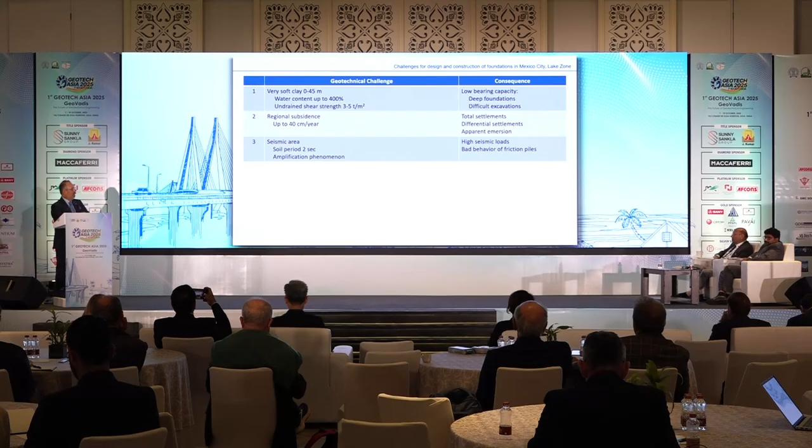To end with, we have a seismic area with this kind of soil period and amplification phenomena, because the soft clay presence conducts to high seismic loads and bad behavior, especially with friction piles.

In excavations, that's the topic for today, the record in soft soil is 40 meters, in sand and clay 40 meters, and in silty sand 50 meters. There are some examples of those kind of excavations, which are a challenge these days.

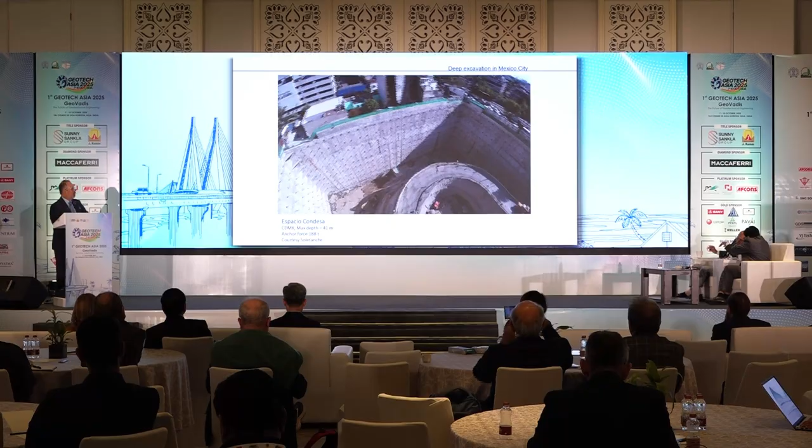This video, courtesy of Soletanche Bachy, shows you this kind of excavation. This is 40 meters depth, supported by a slurry wall, and the shoring system is post-tension anchors. You can see it's a challenge both in geotechnical and logistic engineering.

So we have to manage to interact between contractors and consultants to solve this kind of construction procedures.

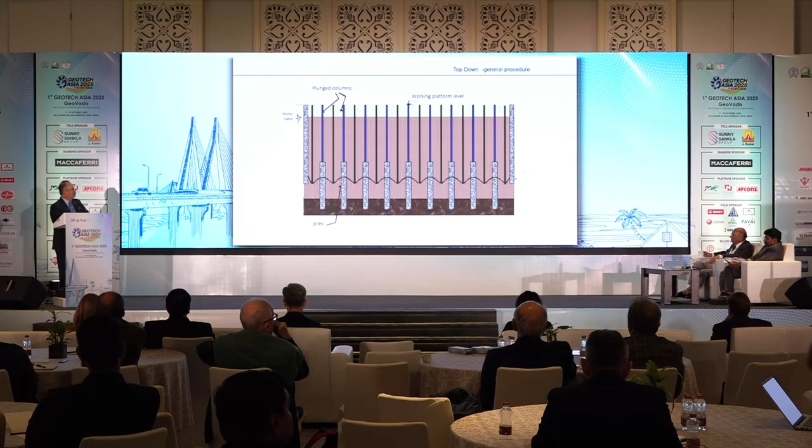Afterwards you construct the ground level slab, leaving a separate void to access for excavation. Then you excavate under the slab, which is supported by the slurry walls and the piles, and you can excavate the first level of basement.

At the same time you can go up with the structure. That's how it's called top-down, because you go top and then you can go down. It saves a lot of time in the construction schedule overall, since you are doing these two activities simultaneously. Then you build the intermediate slab, keeping the same void that coincides with the one on top.

Now, this slab is a shoring system itself. It saves money for the client because you are not using material that will be disposed of later, like a strut or anchors. This slab is part of the final slab construction.

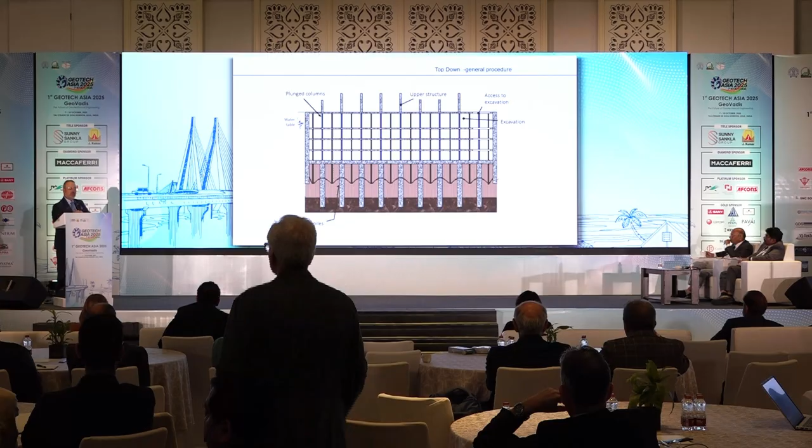You continue this process until you reach the bottom slab, and then these columns are usually completed with more concrete and reinforced steel, and you can also build the car ramps or the elevators and stairs.

Some issues are the plunged columns, which you can put in several ways. Usually they are small metallic profiles like beams, boxes or pipes, and afterwards you cover the columns with more concrete and steel. The problem with these columns is that they should be perfect, because they are the final columns of the project, so they are difficult to put in place.

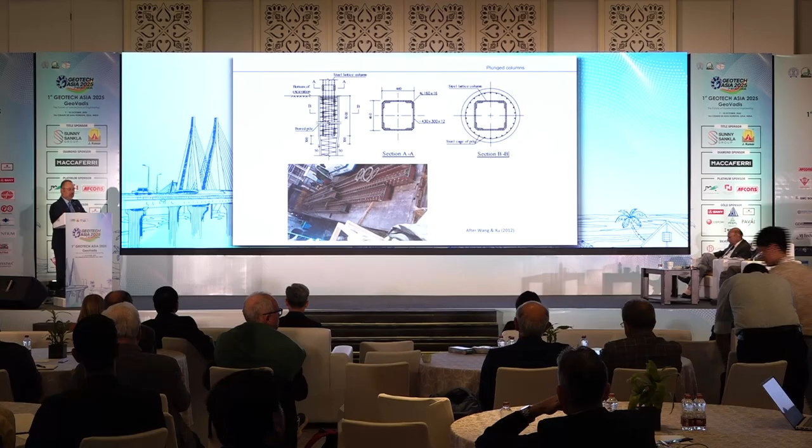Also, you want to add some extra shear devices, like Nelson studs that go inside the concrete of the pile, to increase the shear resistance of the column.

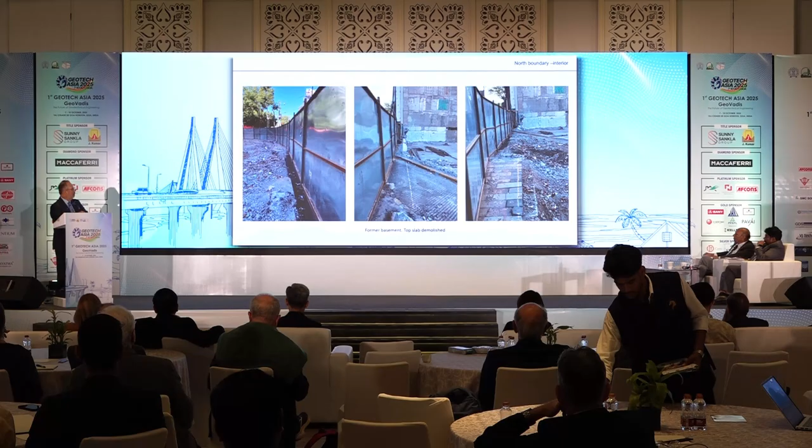On the inner side, the client had already demolished the basement, but not the walls and the bottom slab of the previous project. Now we began demolishing the previous basement wall using soldier piles and some shotcrete, like here.

And we protected the sensitive houses with some wire mesh and hand-placed mortar to avoid damaging these structures.

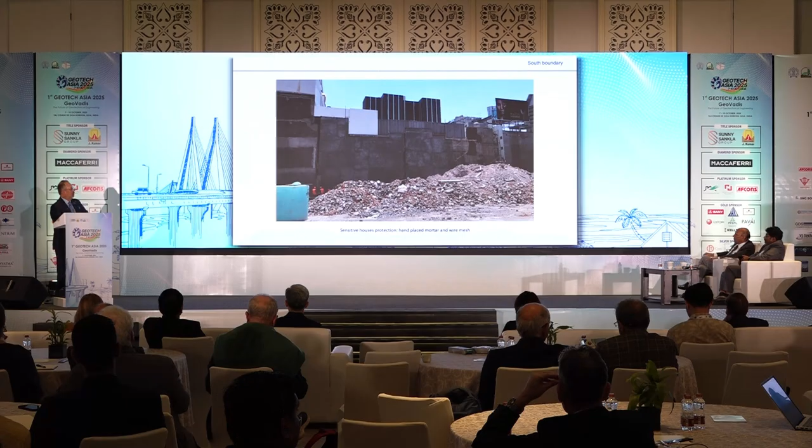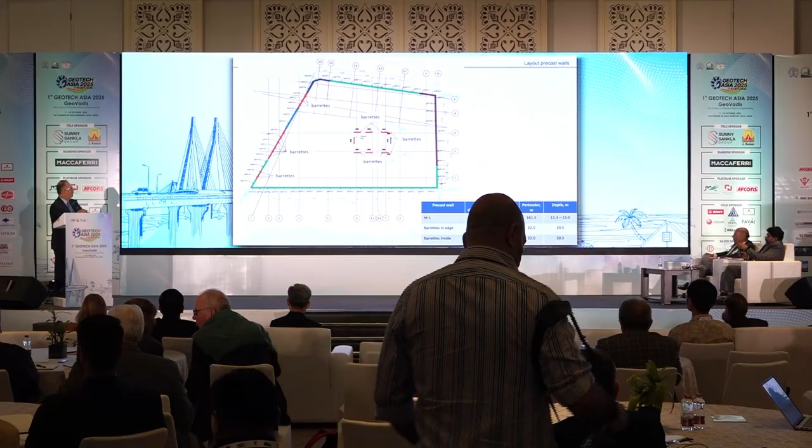The project was solved with a perimeter slurry wall. The architect didn't want columns around here, so we integrated the walls as barrettes in this boundary, and also within the elevator stair area.

So these barrettes are at the same depth as the piles, 30 meters depth. The rest of the wall is only 11 to 15 meters depth.

The general procedure for the precast walls was to excavate under slurry mud, using either bentonite mud or ordinary mud. I think in this one we used ordinary mud because of disposal difficulty. You place the wall inside the excavation, leaving some space in the sides and bottom, which is filled with a self-hardening slurry made of cement, bentonite, and water. The wall is hung from the guide wall with a special device, and when the self-hardening slurry gets some resistance, you can release the wall, and it's sustained by lateral friction.

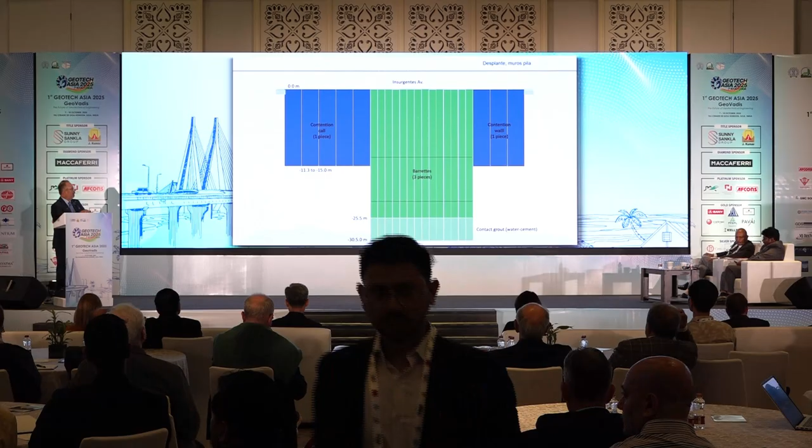Viewing the cut of the walls along the boundary, the foundation wall is in one piece like this, but the barrettes are made in 3 pieces because they're too large, 30 meters long. And remember, they are precast.

This is the detail of the typical precast wall, 3.5 meters width, 40 centimeters thickness, and the barrettes are smaller, 2 meters, because they are made in 3 pieces.

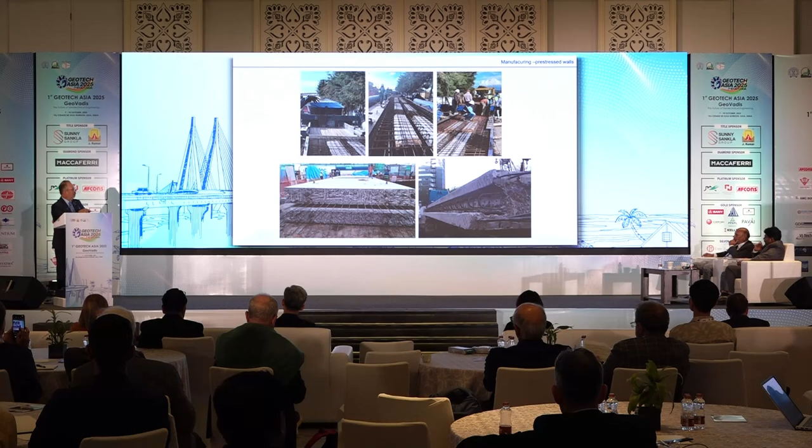This is a view of the manufacturing of the prestressed walls. A prestressed element has the benefit that you have higher resistant bending moment, so you can excavate larger portions with safety. Also, they have some voids to diminish the weight of the wall, so you can handle it with a small crane.

Transportation to the job site, the trucks. This is the limit for the size of the wall during transportation, because you cannot do it very wide, because the roads will not allow it.

Afterwards, there's a procedure for excavating. You excavate the slurry walls always in 3 parts, part A, part B, and part C. Please note that part C is the last one, where you adjust the width of excavation of the trench. You want to do it that way because you have soil on one side, same thing on part B, and part C doesn't matter because you got that here. But you have a square excavation between parts A and B.

If you excavate it continuously, you will have a curved trench, which you don't want because your walls are square. Also, the preferred system is to excavate one of the trenches here and then move the machine to the other, while the crane that will mount the walls stays visible here. Then you go in zigzag rows, as you can see over here.

So there's a lifting and placement of the precast wall. First here is the rig to do the trench. Here are the walls. This, as I remember, is a 120-ton crane.

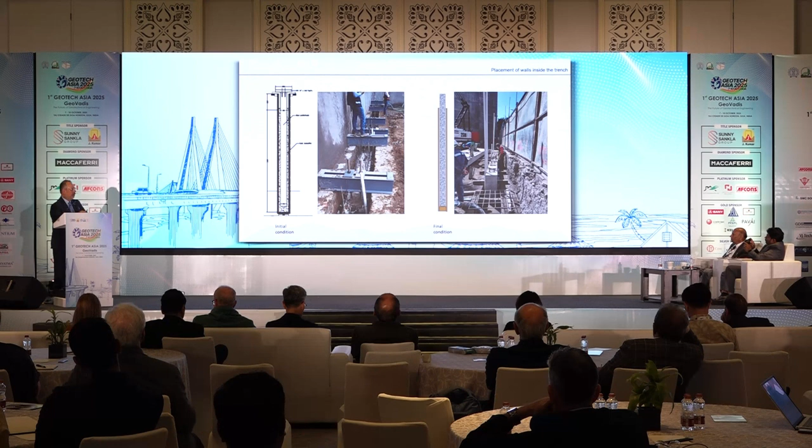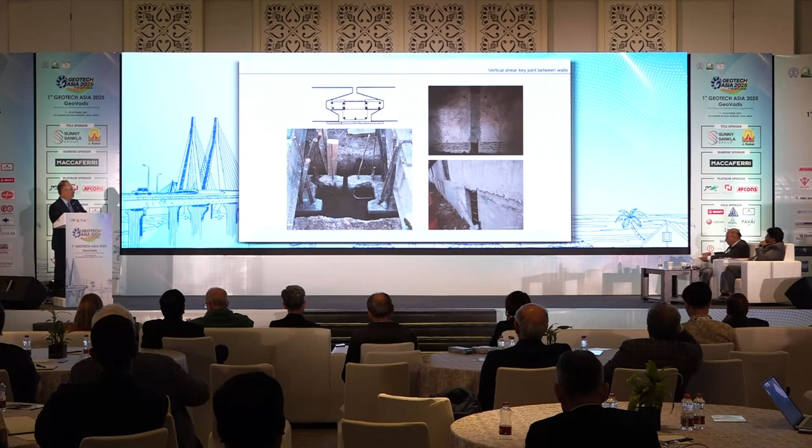Also, there is the connection between the walls, the vertical shear joint. Here it is, with additional reinforcement that is constructed after the excavation with the formwork around here, and it's very tight.

Now, that's the wall, but we also have piles for the load of the building, the foundation. Piles 120 up to 140 centimeters diameter with this distribution.

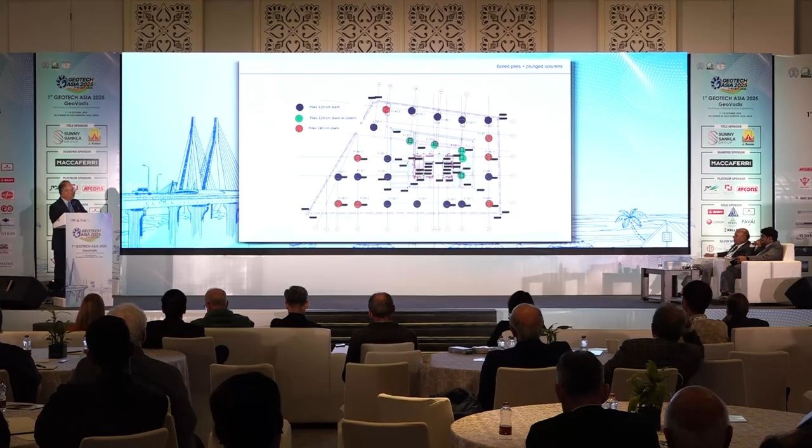And for the top-down procedure, we need plunged columns. So also drilling under slurry mud, the reinforcement steel placement, then the concrete with tremie pipe, and you want to put the column with the fresh concrete in here.

And there's a metallic element here with shear connections for receiving the column. And afterwards we fill the void on the top with regular material to avoid accidents in the job site.

So here it is the guide wall, the columns that are transported to this job site, and here the connections with additional shear resistance for the embedment of large columns.

Now in the building city code, we have the imperative necessity. It's mandatory to do piling integrity testing. So for this case, we left some PVC pipes for doing the cross-hole testing.

You know that you place several pipes around and you do the cross-hole testing of the possible combinations, so you can get a full image of how it works.

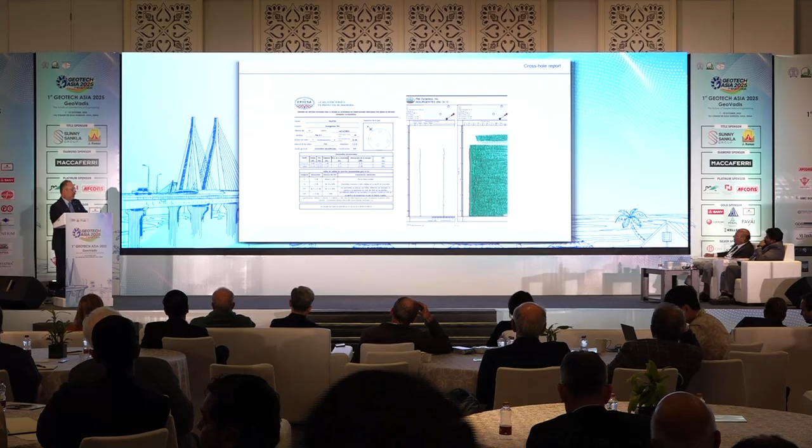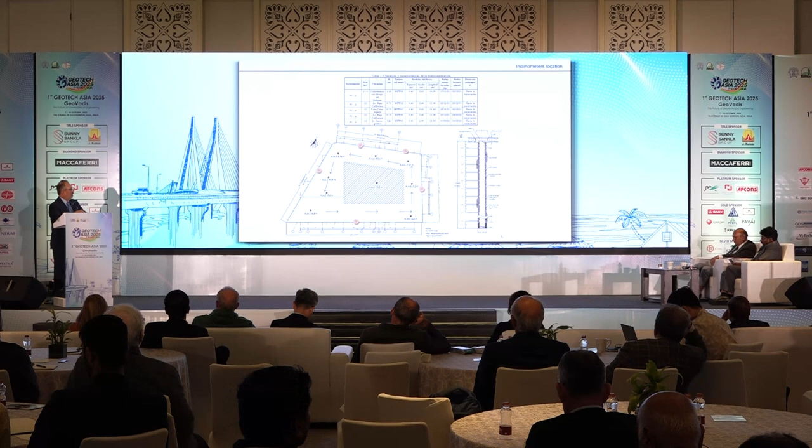This is the finished building, and we placed during the excavation process 5 inclinometers in this area. 2 are near the subway, one in the BC Avenue, one in the sensitive houses, other in the hospital boundary. And well, the early measurements of the inclinometer, hopefully it will behave very well.

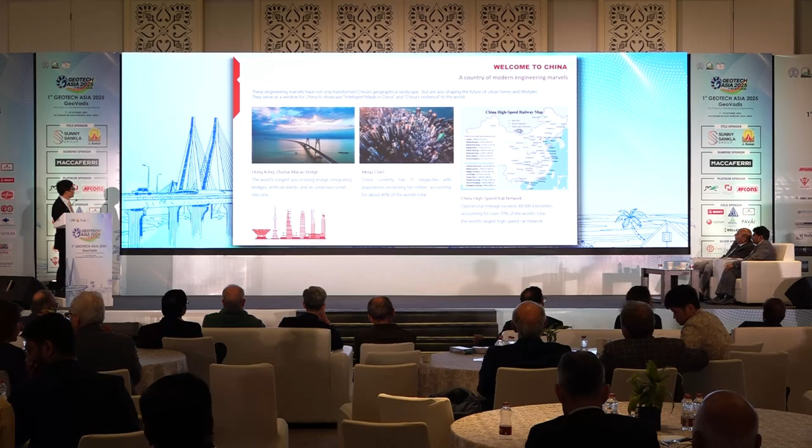This is the picture of Shanghai Metropolitan. We have a lot of civil engineering construction sites in China. Shanghai is the largest city in China, and we have a lot of facilities under construction or already completed. For instance, the high-speed rail network in China is over 50,000 kilometers, connecting many metropolitan areas, and also the long bridge connecting Zhuhai, Macau, and Hong Kong.

And also many urban development and city construction planning projects that are very attractive. In Shanghai, we also have a big metro system, over 830 kilometers, with another 200 kilometers under construction. And also a big trans-ocean road around Shanghai and the port of Donghai.

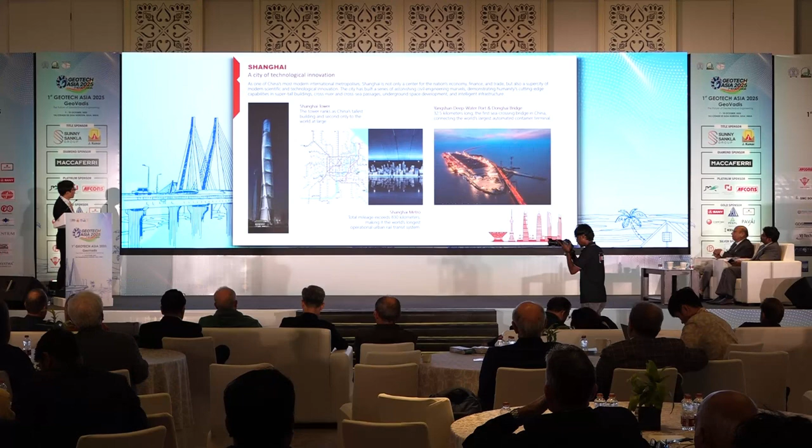This is the Shanghai Tower, built 10 years ago. A small view. There are 26 million people in Shanghai. We have two huge airports, serving more than 100 million people each year, and the world's largest port.

And also exhibition rooms and some scientific parks, many traditional buildings combined with the modern city, and also Chinese traditional art. Welcome to Shanghai. See you in 2030.

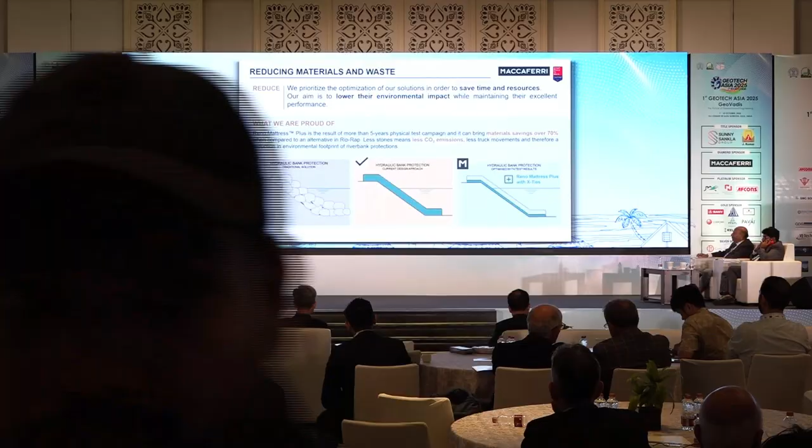This is one example where we promote reducing material and avoiding waste - the Reno mattress, Reno mattress plus textile. If you see the conventional solution of hydraulic bank protection compared to the Maccaferri design, you can see it brings material savings of more than 70%.

This necessarily means less CO2 emissions, less truck movements, and more reduction in the environmental footprint within the river bank protections.

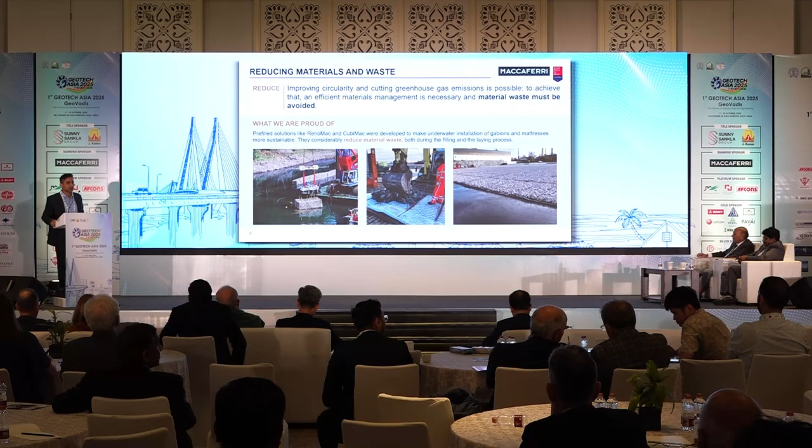Just to extend the same example, our pre-filled solutions like Renomac and Cubimac, which involve underwater installation of the gabions and mattresses, considerably reduce material waste. This is what we have supplied here in India and globally. Use of materials is core to all the solutions we provide. We have a wide range of geogrids through which we maximize the opportunity to reuse site-borne materials as backfill.

Mr. Pathak, can you please conclude in 1-2 minutes?

Okay, maybe I will quickly touch upon this. This is the life cycle transparency. A lot of our products are Environmental Product Declaration certified, EPD certified, which means they have gone through a life cycle assessment to understand how to minimize impact on the environment.

This is a photograph taken from 200 meters from the road level, and there are multiple such kinds of works that we have done both in India and globally.

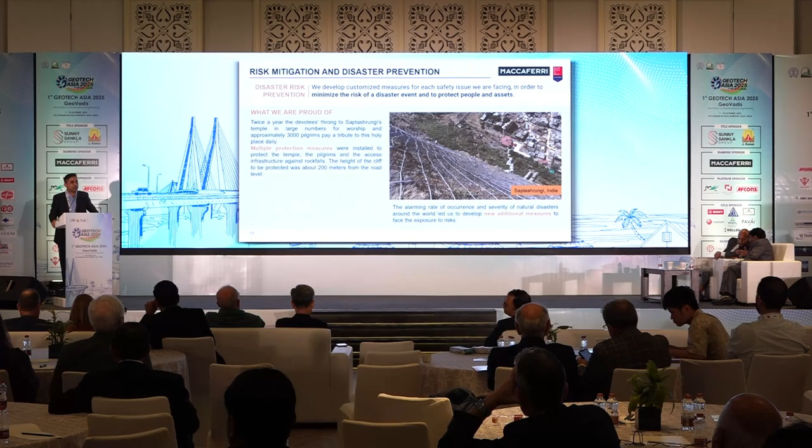Since I have limited time, maybe I'll just touch upon what this necessarily means for Maccaferri: we are committed to using alternate materials which will reduce the carbon footprint. Use of geosynthetics is proven, and we want to bring in more solutions using geosynthetics. In all of our solutions, we use locally available materials rather than necessarily concrete. As we speak, we are constantly innovating tailored engineering solutions for a particular site instead of generic solutions.

Last but not least, in all the solutions we are providing, we are ensuring that we are economical and far better than traditional solutions. Thanks a lot, I hope I am within time.

To summarize, we are committed to reducing the carbon footprint and being more environmentally friendly, and we have been doing a lot of innovation, benchmarking, and testing to ensure that all our products and solutions are aligned with the sustainable development goals. With that, a big thanks to you and all the dignitaries present here.

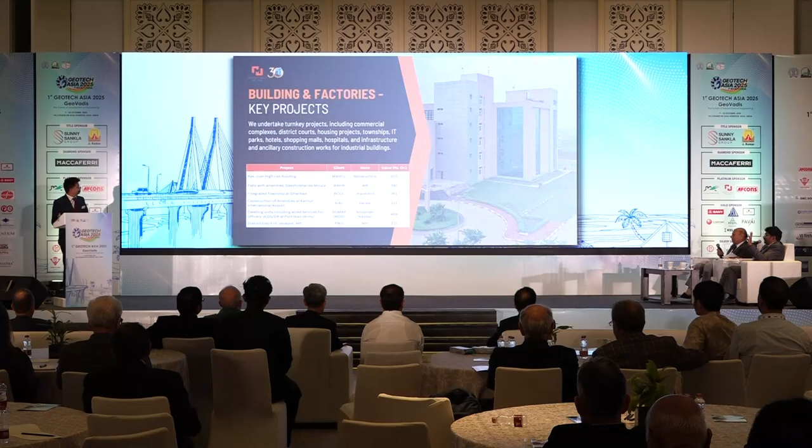Yeah, sorry, somebody is saying something. Here, hello, yeah, here on the desk. Okay, please conclude, please.

These are some of the major projects we have in verticals. Some awards and recognitions which we have achieved in the recent past for our work, for our CSR initiatives. We continuously are gaining our presence across the industry.

Here I am done with my presentation. Thanks for your patience to watch, and thank you to the organizing team for giving us this platform.

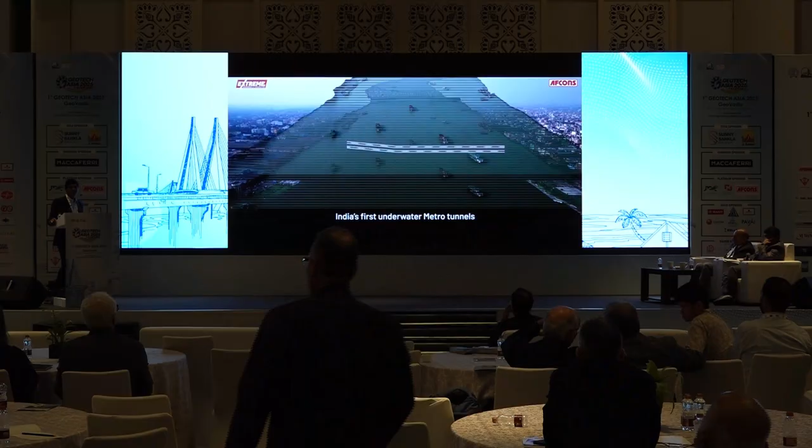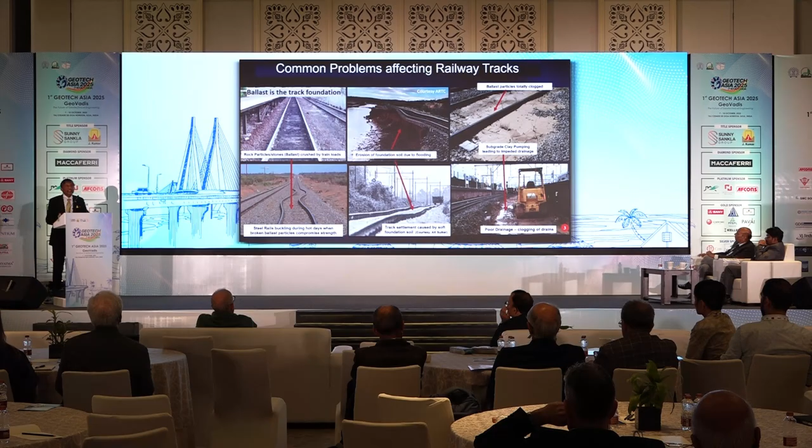The middle picture at the bottom shows a combination of many things leading to differential settlement, and on the right-hand side bottom picture you will see that after heavy rainfall, if the subgrade is not maintained, there is poor drainage. Then the cycle will continue, and you will get one or more of these kinds of problems.

So what I'm going to show you here is how waste like recycled rubber can be used to at least minimize the problems that you have seen from the slides that I presented earlier.

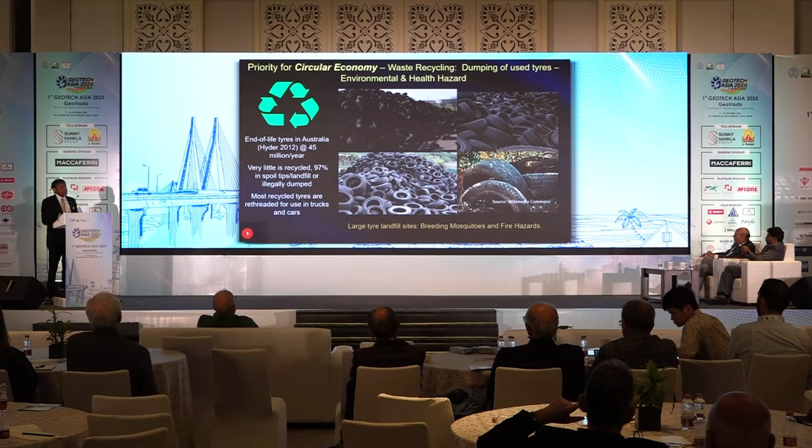In Australia, we discard annually about 2 times the population in tires—about 50 million tires are discarded annually in Australia. And they just accumulate in landfills and other areas, especially in mining sites. So what shall we do with these accumulated tire parts? I came up with this idea about 15 to 20 years ago.

You are talking about 70,000-plus tons, 350 carriages, moving at 80 kilometers per hour. You can calculate half mv squared—that's the amount of kinetic energy that is dissipated onto the track. What these rubber elements do is absorb that energy in the form of strain energy and then release that energy back to the track after the train has passed. As a result, you minimize the damage to the track elements.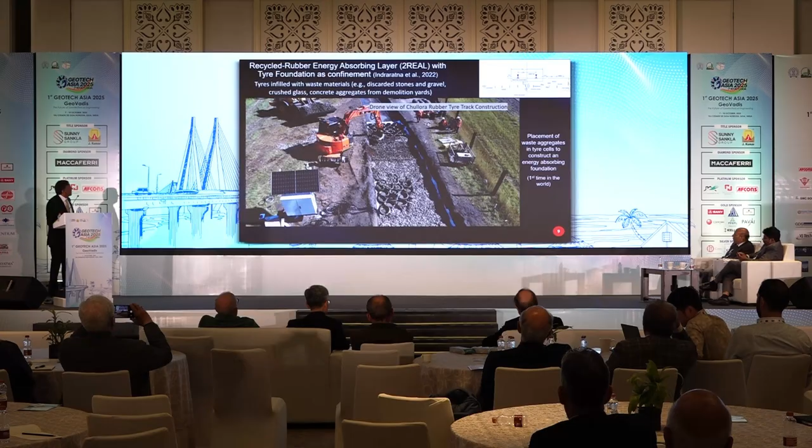This is a video of the construction, made in Chullora. You can see the filling of the rubber tire cells with waste materials, and the entire instrumentation works on solar power. This is a drone picture, and this is how the rubber tire construction is made.

Two most important things coming from this: there are two main design elements to consider under cyclic loading of railway tracks. The first is lateral displacement. If the ballast dilates a lot, the track becomes unstable. So one way of reducing the dilation of the ballast is to increase the confining pressure and reduce the lateral displacement, and that's what these rubber tires do. The confining pressure is substantial, as you can see from the shape of the rubber tires, and from the left-hand side picture the lateral displacements are reduced to a significant extent.

The second most important parameter required in railway track design is the resilient modulus. You can consider this an analogy to the elastic modulus for small strain, but the resilient modulus is actually calculated after about 500,000 loading cycles. When the dynamic modulus comes to a constant level, we call that the resilient modulus. The resilient modulus has increased because of these infilled rubber tires, resulting in reduced settlement over the long term.

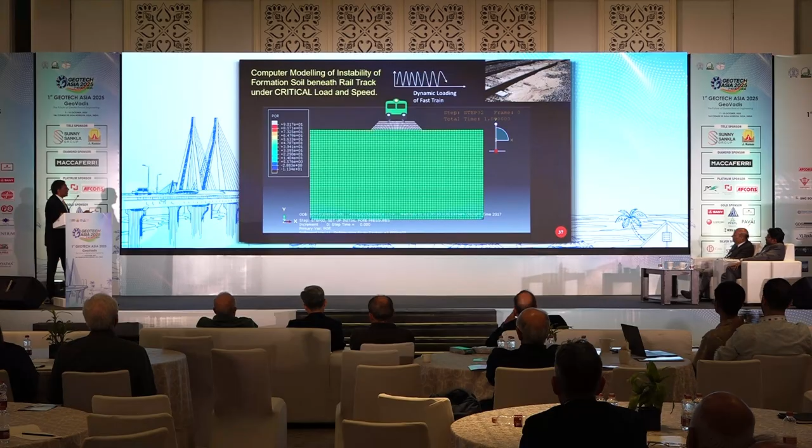Okay, so what happens is, where the rubber tires are at the top, you don't get failure. But just below the rubber tires, you actually get the red color that is taking place. That means the rubber tires are protecting, you can see that from the picture here. The rubber tires protect the soil from being mud pumped, but below the rubber tires there is no protection, and therefore you can actually get mud pumping.

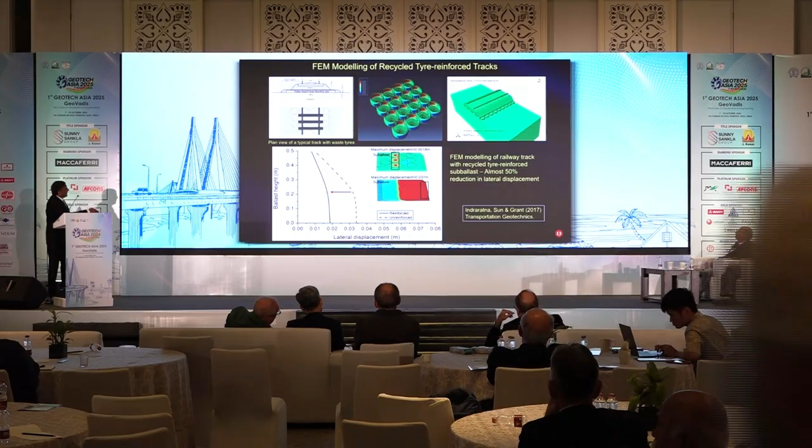So here is the conclusion of that analysis. You can see the finite element analysis of the rubber tire cells here in the middle, and that's the embankment, the railway embankment. And you can see here that the lateral displacements are substantially decreased by the use of infilled rubber tires. Now, this is a very low cost operation.

There are plenty of rubber tires stored in India as well. Only thing you need to do is to bring them to a new track area or a track that has been made, fill it with waste materials, compact it, and then lay the track over that. So the ballast layer, the 300mm ballast layer will still be there, but it is actually built on top of this rubber tire foundation. So this is currently a patented technology, and if you have to use it, please do write to me, and I can waive the royalties and you can use it.

So coming to the second part of the rubber tire mixtures, this is where we take part of the ballast and mix it with rubber granules. The idea of the rubber crumbs, you can see that the shapes are very similar to ballast themselves. You mix it with the actual ballast, and that is called rubber intermixed ballast stratum. And then you can just put it onto the railway track and compact it the normal way.

So if you do that, you will find that the breakage of the ballast is significantly reduced. You only need about 5% to 10% rubber, and you can see that the breakage is substantially reduced irrespective of the confining pressure. Now normally on railway tracks, the confining pressure is around 10 kPa, but if you were to use geogrids and the rubber tire cells, then you can increase the confining pressure to about 60. So by mixing rubber granulates with the typical conventional ballast, the whole idea is to reduce the amount of breakage, as you can see from this diagram as well.

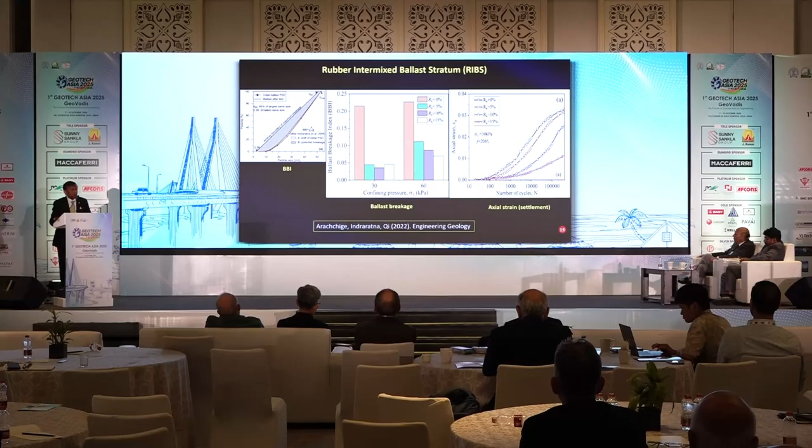Now I'm going to show you a video before I run it. On the left hand side, what you see is a typical ballast with no rubber or too much rubber. On the right hand side, you will see an optimal mix with about 10 to 15% rubber. You can see how the mixing of rubber and its energy absorbing capacity leads to a reduction of noise

and elimination of vibration. So if we run the first test, you can see the amount of noise and you can see the amount of vibration. Even the dynamic actuator seems unstable.

Now that was a cubical triaxial box. Now if I run the right hand side, the loading is exactly the same, but you will find that there is hardly any vibration. Not even one particle of ballast is vibrating.

So that is just with 10 to 15% rubber. So the optimum value is about 10 to 15% rubber.

Now this is very easy to do in the field. You just bring the rubber granules to the site, you have the ballast, you mix it just by the railway, and then you put that and make the real railway track. You don't need any extra skill. The mixing is done by the normal mixing machines, and then you lay the ballast with the rubber and just come back to the normal way.

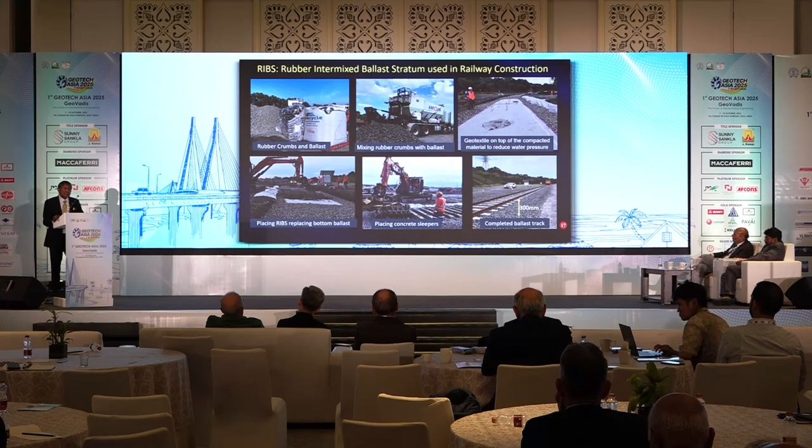Now I'm coming to the third part of it. This is very important. This is about impact damage. Now, those of you who have observed railway wheels, not all of them are perfectly circular, I can assure you that. You can see the amount of corrugations, and that's a flat part of a railway wheel.

And when these imperfections create impact, especially at relatively high speed, you get the hammer effect, because these imperfections plus the corrugations on the rail itself will give you an impact load. And it is that impact load that actually causes the damage to the railway elements.

Now if you were to look at these measured impact loads, these are the stresses that are measured on a real railway track. As soon as a wheel like that crosses the point, you get that impact load. And that impact load can either fracture the concrete sleepers, or break the ballast, or damage the fasteners.

So in order to eliminate this impact damage, you can actually have recycled rubber sheets that can be put underneath your ballast layer. Before doing this, here is just a discrete element model

to look at the effect of particle sizes and shape. I think this morning Professor Madhavi Latha gave a very elegant presentation on the effect of particle sizes and shape. This is very simple. The particle sizes and shapes are created with the actual geometric coordinates, and then you can mix these particle sizes

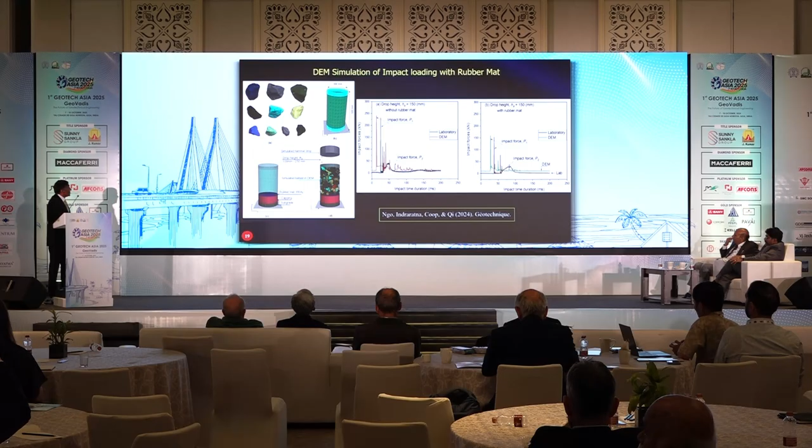So these rubber sheets are actually made from discarded conveyor belts. You get kilometers and kilometers of rolls of discarded conveyor belts thrown out by mineral processing companies and mining companies. They are slightly damaged, but they can still be used for the purpose that is here.

Now, on the right-hand side picture, I'm going to show a laboratory simulation of the impact load. Calculate the P1 impact load from the discrete element model, and then you apply that value of P1 to the dynamic actuator on a sample of ballast in the triaxial equipment. With this application of the impact load, you can then measure how much the particle size distribution has changed, and therefore calculate the damage based on that impact load.

So if you can run that video, you can see the hammer falling and creating the impact.

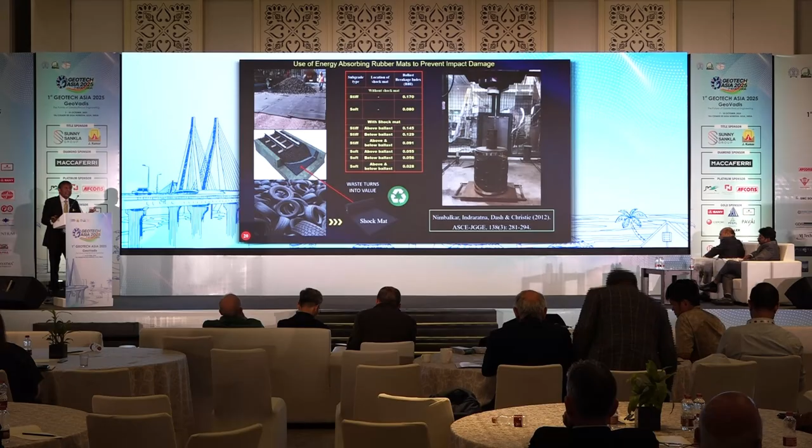As long as it doesn't fail, the soft soil itself is an energy reservoir. So the best application of the rubber sheets as a shock absorbing or impact damping element is either on a concrete bridge deck or where the track is made on a rocky road. So then you can use these rubber sheets very effectively.

I'm not going to go to the details of it. Constitutive models have been produced for how these rubber elements have been used, because in design, you can't do a design by looking at pictures, you need equations, you need finite element models. We have developed these energy absorbing details by looking at two types of energy. When you are looking at the granular materials, particles can slide over each other, or the particles can roll and break. So there are two types of energy.

The energy that goes to sliding of particles without breaking, and then the energy required to actually physically break the particles. So if you add these two together, that gives you the total energy.

Now, when you have a triaxial equipment, you can measure the dilation of a granular material. You can calculate from the strain energy the actual energy that is experimentally determined.

Then you plot the actual energy dissipation calculated in the laboratory on the horizontal axis, and what you predict from this equation on the vertical axis, against the 45-degree line, and you can see that it's a pretty good fit. So the calibration of these equations is done, and the parameters A, B, and C are empirical parameters, and by fitting them onto the 45-degree line, you can back calculate the A, B, C values that are required for a given rock material.

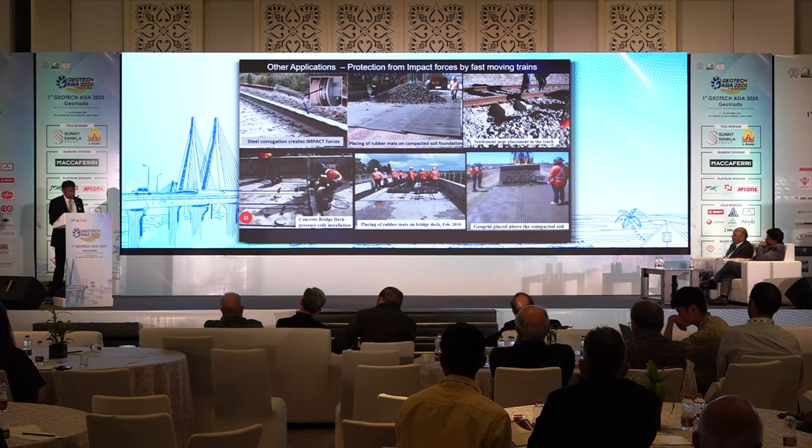So this is just a summary of the ballast breakage assessment. As I said earlier, to minimize the impact damage, the effectiveness is greatest when the subgrade is very stiff. So if the subgrade is rock, or if it's a concrete bridge deck, you can expect the ballast particles to be crushed very quickly because of the high reaction. So you will see that on a concrete bridge deck here, the breakage is much less.

So here you can see the original track, for both rock and soil the particle breakage will still be reduced to some extent using these rubber elements, but the best effect is if you are on a concrete bridge. In Australia, it's almost accepted that on a concrete bridge deck, you simply will not put the ballast right on it. You will always use shock mats, which can easily be made with recycled rubber, making it a very cost-effective process.

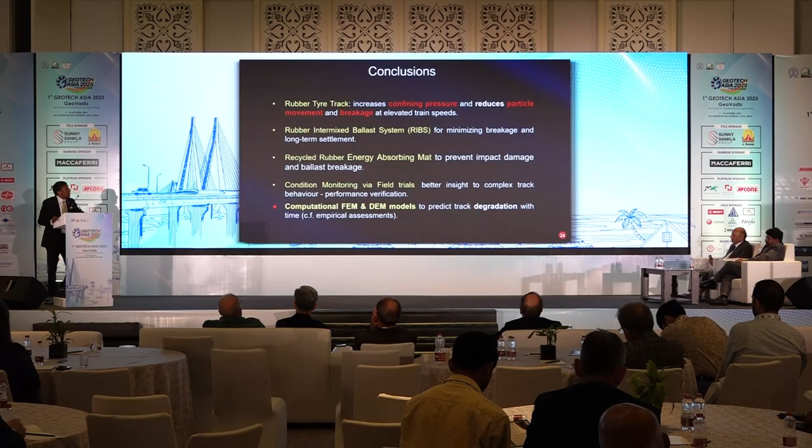To conclude, the rubber tire track increases confining pressure and reduces particle movement and breakage at elevated train speeds. By mixing rubber granulates with conventional ballast, you reduce attrition between particles, and as a result reduce breakage, so particles remain large even after a long time. This reduces settlement of the track, since when particles break, they compact more and settlements are larger. If you prevent particles from breaking, you have greater friction and less settlement of your railway tracks.

Recycled rubber energy absorbing mats are excellent for impact damage and ballast breakage prevention, and these are cost effective if made with recycled materials.

It's very important that all this academic work, the finite element models, the discrete element models, with all their complicated equations - for practicing engineers, in my experience, and I work with practicing engineers all the time, in fact I have more projects with practicing engineers than actual academic theoretical engineers, what I've always learned is that if you want something developed at a university to be adopted quickly by practicing engineers, don't make them constitutive models. Just demonstrate that in the field they actually work.

So that's condition monitoring via field work, and that is what we have seen from these slides. The computational FEM and DEM models are important for designing, because as I said earlier, your design codes need to be refreshed and rejuvenated, since some of these design codes are pretty old. But with modern numerical models, you can capture concepts such as energy absorbing models, and then redo the railway track design, capturing particle breakage and confining pressure, as I explained.

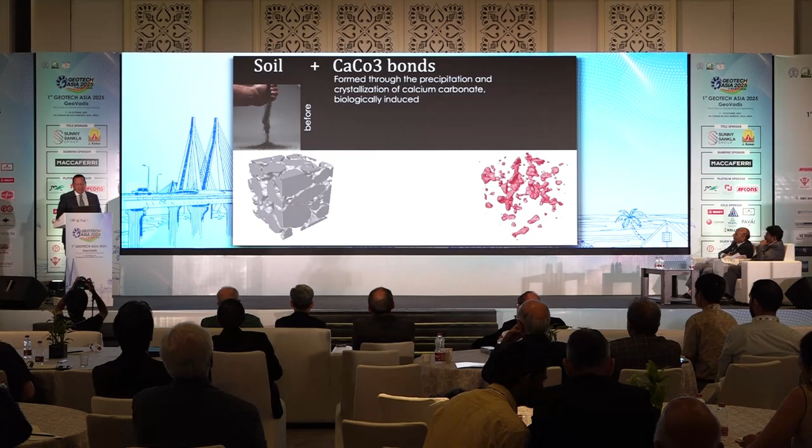So what is biocementation? It's a way to cement soil, to strengthen it, but we try to do it naturally by having calcite precipitate inside our porous media through a biological process. If you have a soil on one side, you have a means to create your structure of calcite. Our goal is to put this calcite inside the soil to have it cemented and dissipated, and this is what we call biocement material.

So why do we need this? Why is it important for our field? All of you here in the room are familiar with the traditional methods. No matter whether it's cement that you inject, lime, resin—all those binders have a major issue: an environmental issue. Our conventional soil improvement techniques pollute water, have issues with grouting wastes, and even cement production creates major CO2 emissions. So we need to come with something different in our field.

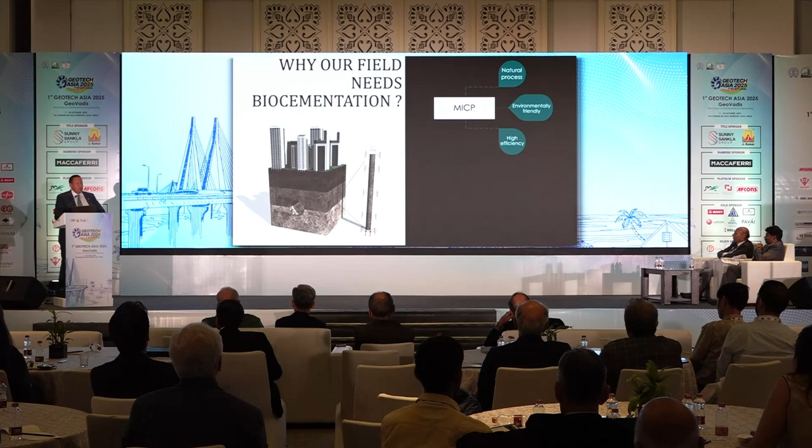This is what has been initiated since almost, I would say, 10 years at least, with this microbial-induced calcite precipitation process that we talk about. Why is it important for us? Because it's a natural process, completely environmentally friendly, very neutral to nature, and highly efficient—which is also very important, because if we come with a new technology, it should be efficient and also cost effective financially. This is also an item I will cover. And then you can apply it to all type of conventional reinforcements that you are familiar with.

So basically, to summarize this introduction, the idea here is that with the liquid agent—because we will use liquid with the viscosity of water—we would like to turn, let's say in a simple way, sand into a rock in a fast way, long-lasting, almost forever, and by promoting also safer and more sustainable work.

So the history of this technology is not that old. We started—there were some groups—let's say our first paper was in 2009. Since then we've seen growth in terms of scientific production; the community is really impressive. I think it's almost the most dynamic field in terms of journal papers in recent years. Two years ago, we had almost more than 400 journal papers.

I would like to mention one of the first publications we did, this book that was a technical symposium in print in 2013. At that time, our community was considering this field as exotic. But what I will show you right now is all the parts that we did to enter the market, to provide a product that I use in my practice.

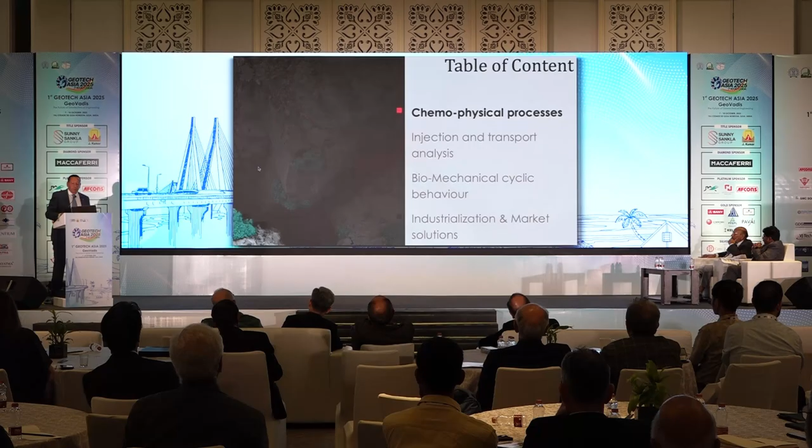Chemically speaking, what we are talking about is a simple process where we mix urea with water to get ammonium and carbonate. This is what happens in nature to get rocks from sand—sandstone is like this. The only thing we do is make the process faster by using bacteria as a catalyst, so we increase the process almost tenfold. If this carbonate is mixed with calcium, you get calcite, calcium carbonate. This is what you see here inside water—simply calcium carbonate forming in water.

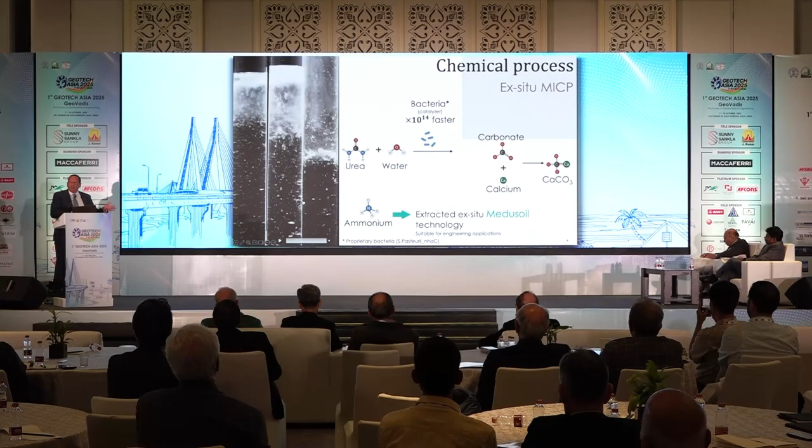Basically, what we will do in our case is extract this ammonium to put it aside—either we make a product from it, which I won't discuss much today, or we work on this process. So the goal now is that what you see here inside tubes of water, we would like to have happening in the soil. We would like to be able to inject porous material and ensure we have distributed development of the calcite inside our process. And this is what we can get if we do it.

Using biocement, the solution is a liquid, so you can inject liquid so that you can inject almost any type of size. And if you even inject it with your bacteria, because you would like to have the process happening on the ground, in that case the size of our bacteria is, let's say, 5 micron maximum. So it means that you can enter really fine grained soils.

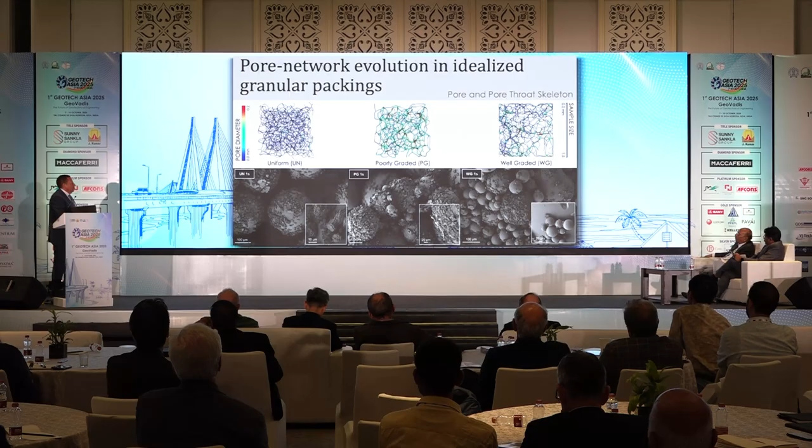There are no issues. So as soon as we know about the processes, now let's look at how we can model, design, and control when we inject this solution into the ground. To do that, we have to deal with mathematical tools. So sorry for the equations that we see now, but they are really needed to design any project.

So our porous materials will be described in this way. You have phases that are the minerals, calcite, or water, liquid, or if it's partially saturated, you can have different fluids there. But usually in mechanics of porous materials, we can handle the same things in terms of species, which is better from a computing perspective.

So we can have those different species that you see here. I'm not going to go into details, but we describe this separately because this will allow us later on to write the correct mechanics for it.

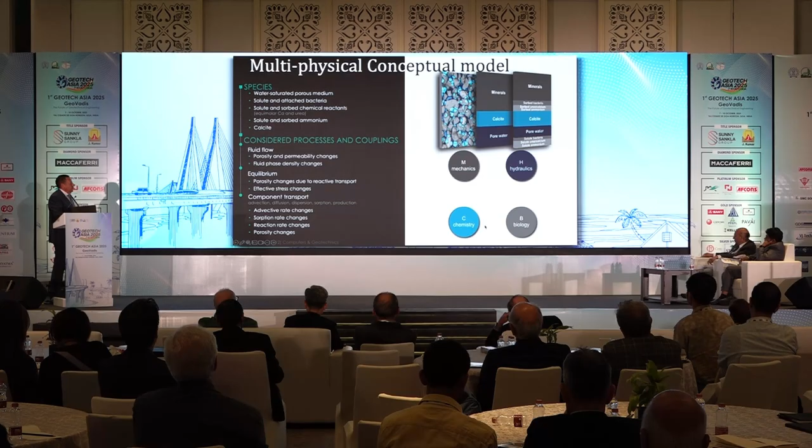And then we look at what are the physical processes: mechanics, stress-strain, hydraulic with Darcy's law, biological and chemical processes that I was showing before. The point is that all those processes will interact with each other, so we have to express that also in our equations. So there are some equations to deal with that.

So as I said, we describe things in terms of species. We simply express conservation of quantities for each of those species, which is the reality of the things. So the species that we have are bacteria, ammonium, our calcium carbonate, and urea, plus the fluid of course.

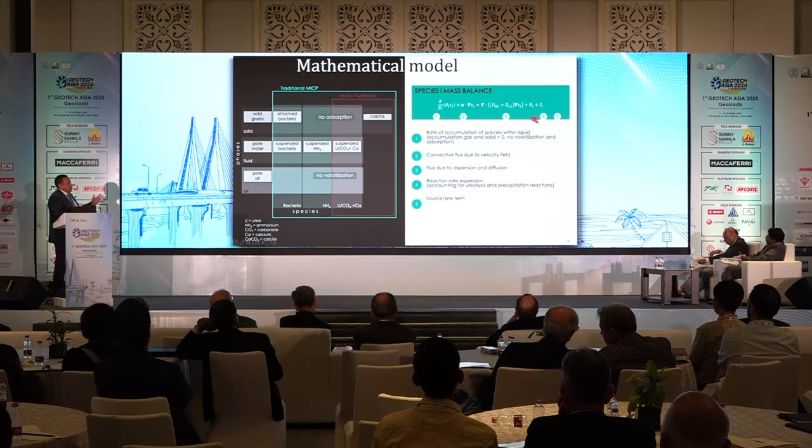There is one equation that applies to all of them, because all of them are fluids, including the solid matrix, which has its own mass balance equation. So we apply simply this mass balance equation: this is change in time, this is convection, here we have this dispersion, and the diffusion and the two source terms. We apply this equation to all of them.

And as I was saying before, there are two ways to have the process. Either the reaction will happen in the ground with the bacteria, in which case you need to express the reaction with this mathematical equation, or you do everything outside the ground in a bioreactor, in which case you need just those equations, you don't solve this one.

So if you do it in a bioreactor, this is what we call hydrolysis. So you have the precipitation rate that we express with this equation.

From this term of the precipitation rate, you introduce it into change of porosity. If you change the porosity, that will give you change in permeability, and to this you add diffusion and dissolution. This is the last set of equations you will see today.

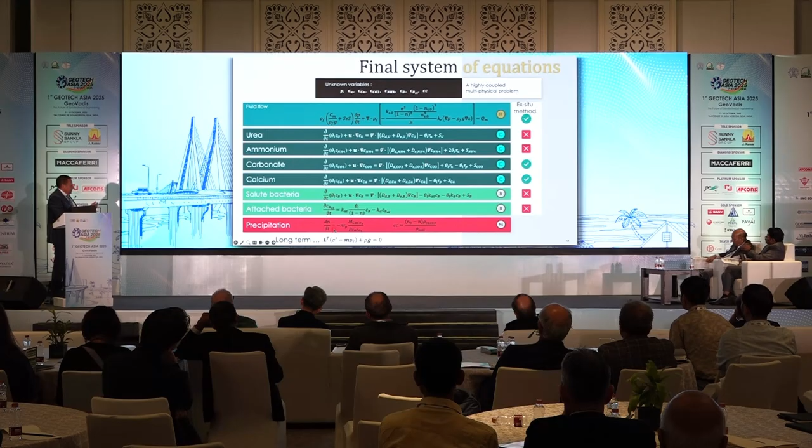Just to be able to analyze your system, you have to solve those equations. Depending on the type of injection that you do, you either solve all of them or just those taken here. So you have conservation of the mass of the fluid, precipitation, and equilibrium. As soon as we get something like that, we have to validate it.

To validate it, we have to run a large number of experiments. So we designed this geomechanical lab, a system where we are able to control all the boundary conditions, the hydraulics, the mechanics, the injection, and so on.

So there are two basins of 150 cubic meters of soil, one we use as a reference basin each time, and one the injection one. They are independent. We have the drains that you see here, 18 of them, and 16 injection tubes. Here you see the size of our tubing.

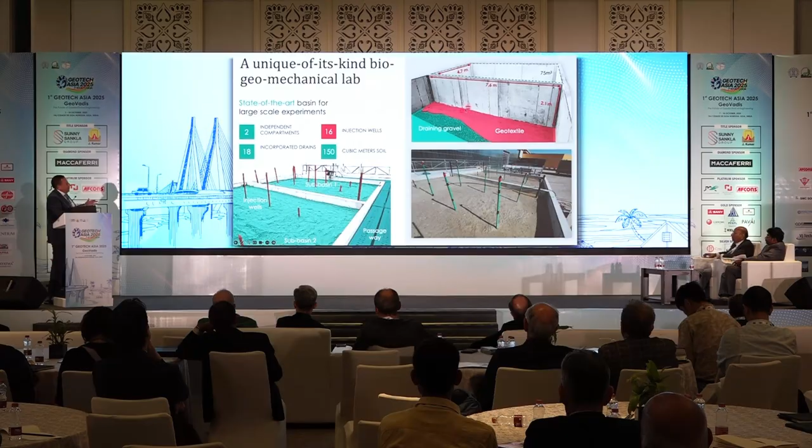We were able to run a large amount of experiments that allow us to check the validity of our model, to improve it, and so on. In each type of experiment, we look, for instance, from a mechanical perspective, we can do dynamic penetrometer tests.

We look at the shear stress. Blue shows rather low values for treated material at different depths and cross sections, and the more it's yellow, the higher it is. Let me show you a real example.

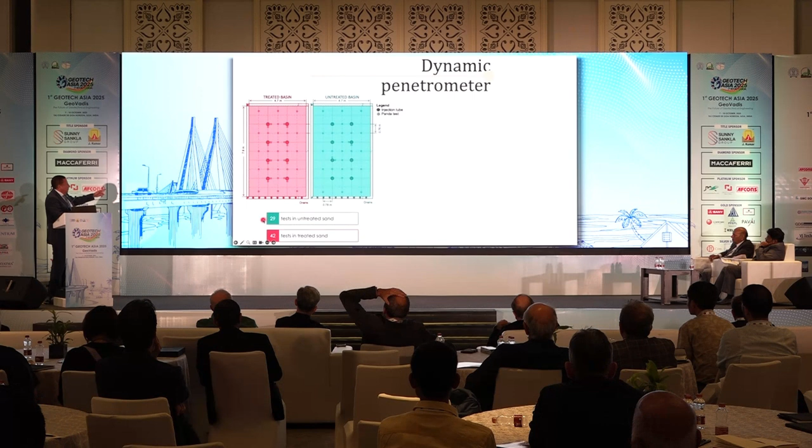In this case, statistically it's important for us to have things well reproduced. We have 29 tested untreated sand samples, and on the right side 42 tests in treated, injected sand. We have 8 different injection wells, and all the small points are measurement points, so we get different results.

For instance, if we look at the tip resistance in tube number 1, at 2 different distances, this is before injecting our ground. Let's say the average resistance value is 0.5 megapascal. After injection, we move to 2 to 3, almost to 4 megapascal of strength in the ground.

This is vertically distributed across different wells and different tubes. This is the type of result that we get from this experiment.

We can also look at technology for injection. For instance, if you'd like to have it uniformly distributed, we can use a deep pipe. In that case, you see a uniformly distributed improvement of strength at a distance of 50 centimeters from the injection point, moving from about 1 megapascal to 4 megapascal resistance.

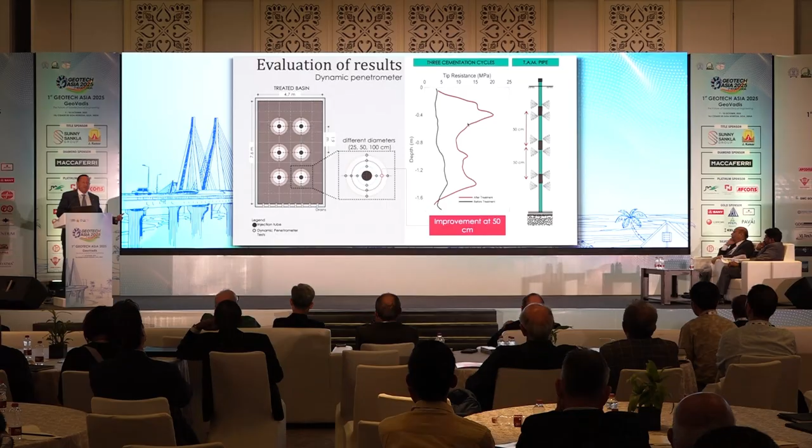And if you'd like to have, at some points, a very strong increase of strength, like for stabilization of a slope, where we have a layer we want to stabilize, if you use what we call a tube-à-manchette pipe, we can even reach 20 megapascal of strength at identified points.

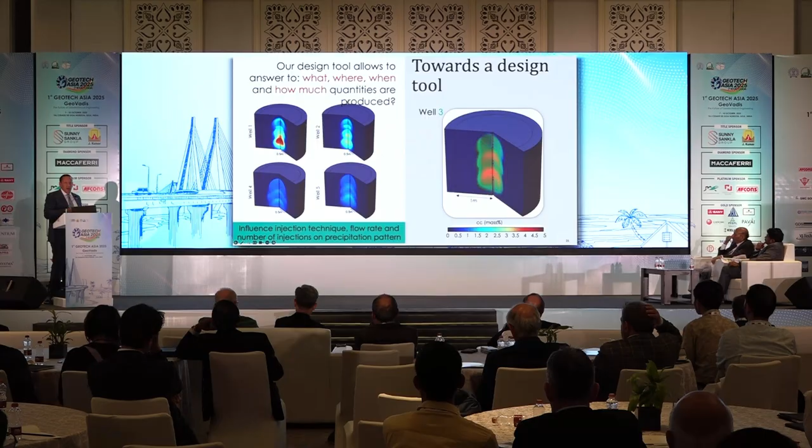Just to show you how it looks in the experiment, when we remove the non-affected areas of the sand, this is the type of cemented areas that we have. With this, we were able to validate our design tools. We are able to say what, where, when, and how much quantity is produced in the ground in the system.

With this, we can reproduce, for instance, the experiment that I was showing you before, where we have 6 injection points. I will not talk that much about the cyclic component, but we do have a cyclic component in it, of course.

So we started by doing conventional tests on cemented materials at different calcite amounts. This is UCS, this is the modulus. As you can see, we have an increase of resistance with the increase of the amount of calcite, but this doesn't go to infinity.

We have a kind of elliptical or exponential shape to it, so at a given point we reach a limit where we cannot improve the resistance anymore, but we see this increase of resistance for different types of sands, in this case 3 that were tested. From here, we came to the concept that depending on the amount of calcite we put in the ground, we can treat different types of problems.

So if we are dealing with liquefaction or erosion protection, we need a very limited amount of calcite, so let's say between 2 and 3 of calcium carbonate is enough to treat this. Indeed, with increasing bearing capacity, you need a little bit more, and so on.

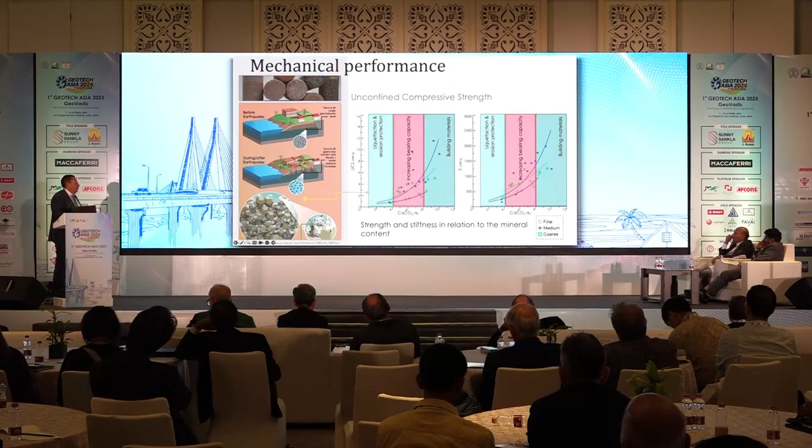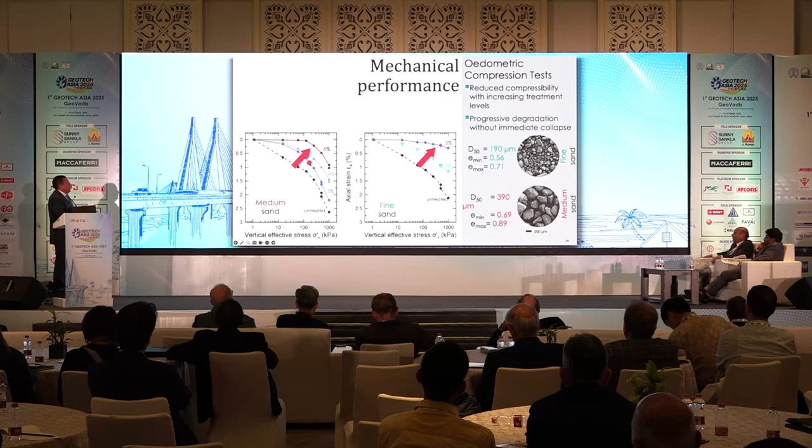So this was the starting point, and then we tried conventional testing, geotechnical testing. We did oedometric tests at different values of precipitated calcite on different materials. As we can see, following conventional techniques for cemented soils in general, you have an increase in rigidity and an increase in pre-consolidation stress with the amount of calcite.

And of course, if you have an increase of pre-consolidation stress, look now from the other side at shear strength. Here are three triaxial tests at three confining stresses. The first results are untreated material, and here you have treated materials. Different colors are medium sand and fine sand materials. You increase the peak because you increase your pre-consolidation stress, then you come back to your state at the end.

For instance, if we compare an untreated sand at 0 kPa with a treatment of 8 percent, in this case we are reaching something like 350 kilopascals. So it shows the increase in cohesion, but also the increase in friction at the peak, as you can see in some of the numbers.

If you introduce this in the volumetric plane, of course we introduce dilatancy, as you can expect. So now we have materials that are dilatant, and then we come back to our conventional critical state. So we tried to understand what is the reason for these processes.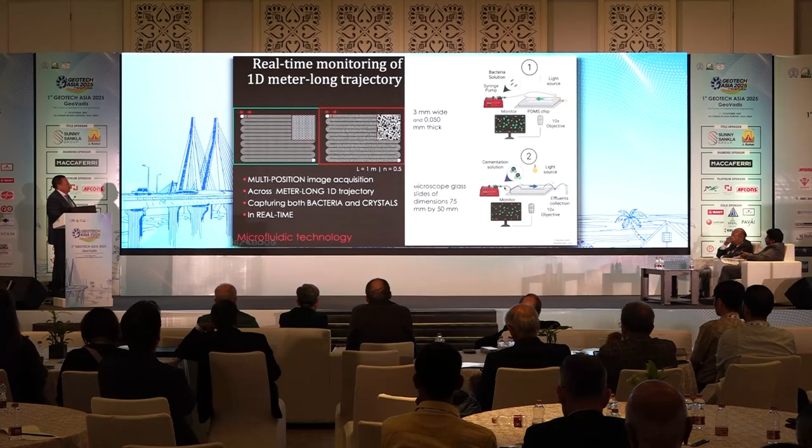So this is our PDMS chip. We inject with a syringe pump first our bacteria solution from this side and follow what happens. It's 3 millimeters wide, 7.5 by 5 centimeters in size, and we inject the other solution from the side and observe what's happening. I'll start with the left side, which is the homogenized way of distributing porosity.

You see here calcite being generated at different points. We'll come back to it. You see it better with heterogeneous material, which is more like a natural material. So what we see basically is that two types of contacts are created, two types of roles that this calcite plays in the soil.

The first type is that it creates bonds between the grains. We call these effective bonds, because this is glue created between the grains. The other type is that the calcite is deposited on the surface of the grains but doesn't bring them into contact, so it's just densifying them.

From this process, if we go now to the X-ray, we analyze the observation this way. On one side we have densification - all those blue calcite elements are solid on the grain, but they don't bring the grains into contact with each other. On the other side we have cementation, the glue that now joins the grains together.

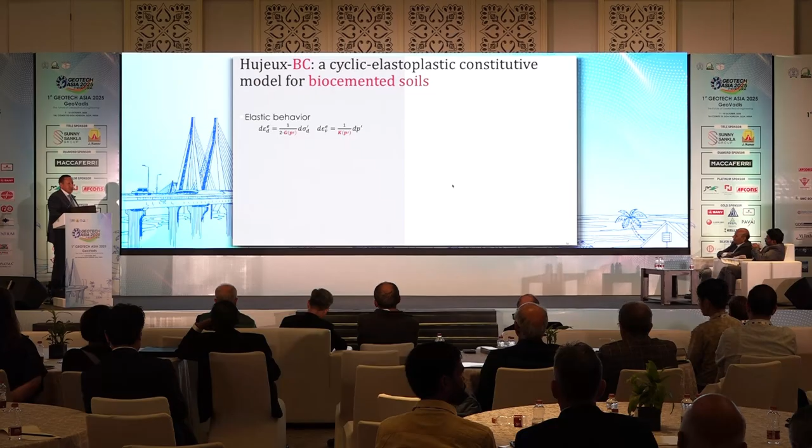Basically now the exercise is rather easy, because we just have to introduce those two elements in a constitutive way. In our case we started with a concept model that I've been familiar with since my time at the Conservatoire in Paris - this Hujeux model for biocementation, but you can apply this to any model from the Cam Clay family of models. Basically you have an elastic nonlinear part, which is modulus and bulk modulus, and you have the deviatoric limit represented by its size, the pre-consolidation stress.

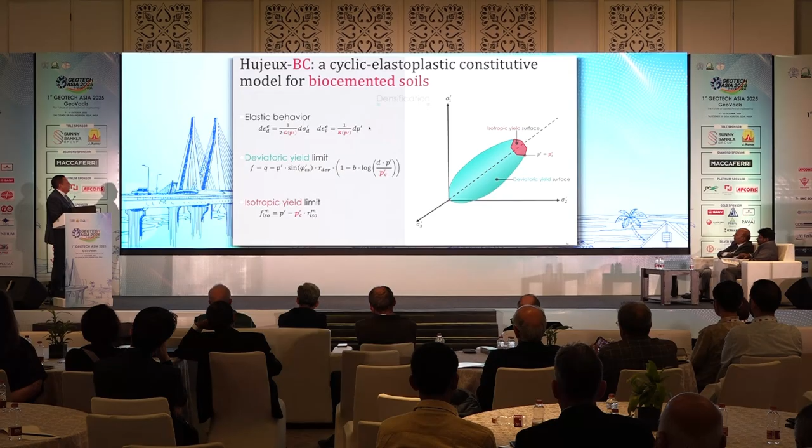Then you can have something else, not that important. Basically we modify those three parameters to account for this bonding and densification. So for densification, each time we have to do it for the elastic and plastic components - so we have the bioelastic part.

So basically, for bulk modulus and shear modulus, we have introduced a coefficient here representing densification that is related to the density of the calcite and the mass of calcite in the soil. From the plastic part, it's a very conventional classification of Cam-clay type models.

You are increasing your preconsolidation stress, you are changing your specific volume, and this you do by introducing this term here, the densification variable. So you have now an apparent preconsolidation stress with respect to the initial preconsolidation.

Then you do the same exercise for bonding, but now in terms of shear modulus. So we use the shear wave velocity as an element to define this bonding coefficient that we put here, again as a coefficient for shear modulus.

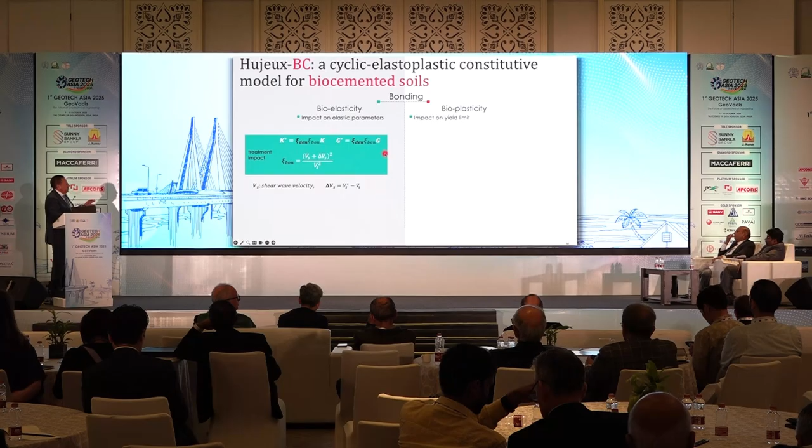For the plasticity part, we act like for destructuration of structural clays: if you have an increase of your preconsolidation stress that makes you go to a value higher than your initial preconsolidation stress, then the more you shear the material, the more you tend to come back to your initial normally consolidated line. So this debonding, or destructuring process, is induced with this coefficient here, exactly as people do with destructuration of structured soils.

This last item is related to cyclic modeling for liquefaction aspects, which I won't discuss much, but just to show in terms of G-gamma curves that you are familiar with, the new shape of the G-gamma curve will be like this, showing that you need more energy to reach liquefaction for these type of materials.

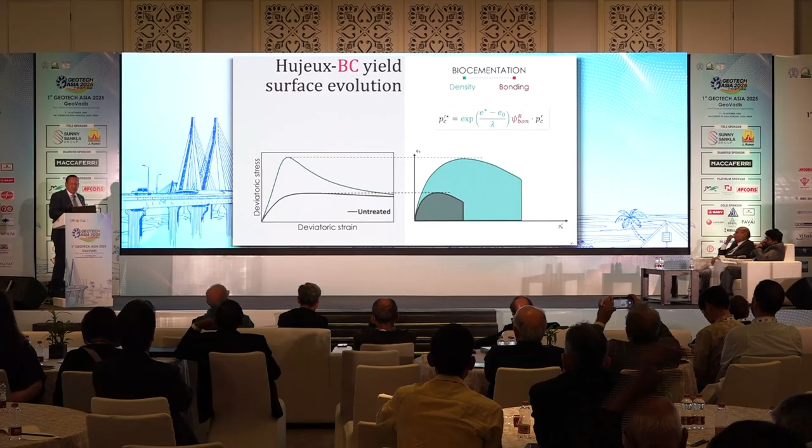If you combine all those things together, basically what you get is: if this is your untreated material with its yield limit here, when you treat your material you present what we have seen before in the experimental results. I'll show one case with back analysis of two experimental results from the literature, where when you put those ingredients in your model, you get an increase of strength in terms of peak, then you come back to your critical state, and you have the same thing for liquefaction.

So from this, we asked how we can move to the market, how we can make from this a real product used on a daily basis on the market.

So we started first by patenting what we developed. Here I'm showing you three among our patents. The first one is a system for ground consolidation that I showed before. The second one is how to produce such solutions, that is a nitrogen-containing species-free solution. The third one is how to combine our solution with geotextiles.

So among those things, I'll focus today just on one of our products, the BS1. And we developed also three exclusive microorganisms to have the process happening in a more efficient way.

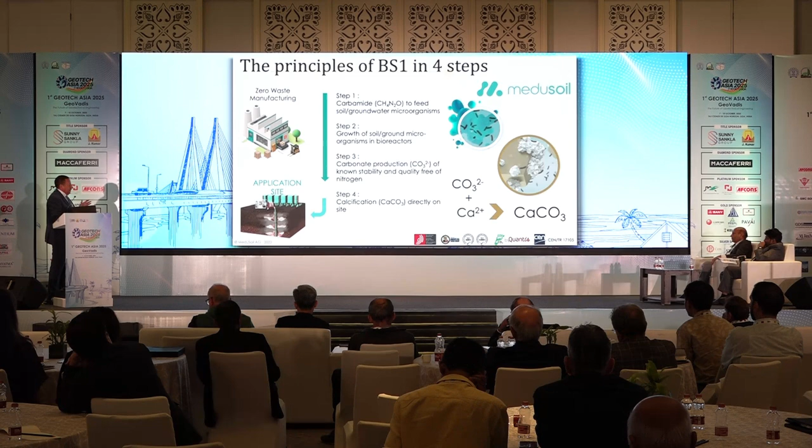Of course all this process follows all the regulations in terms of ISO norms or European norms, so everything functions in a professional way. This is how it looks on site. So we have our two solutions coming from the bioreactor.

When it comes to slope stabilization, as I mentioned before, usually we have this weak layer, so you don't need to strengthen the whole ground, but just focus on the area where we have the failure line.

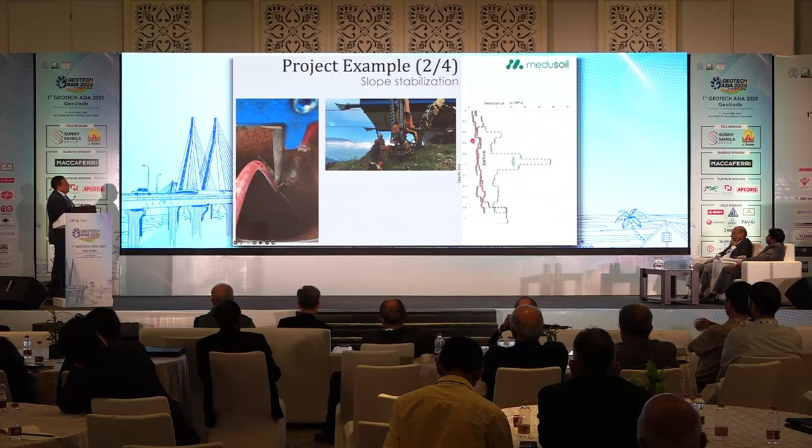So here is this project where this is the tip resistance before injection, and here we target to enhance strength at 1 meter depth. You see here we reach almost 30 megapascals.

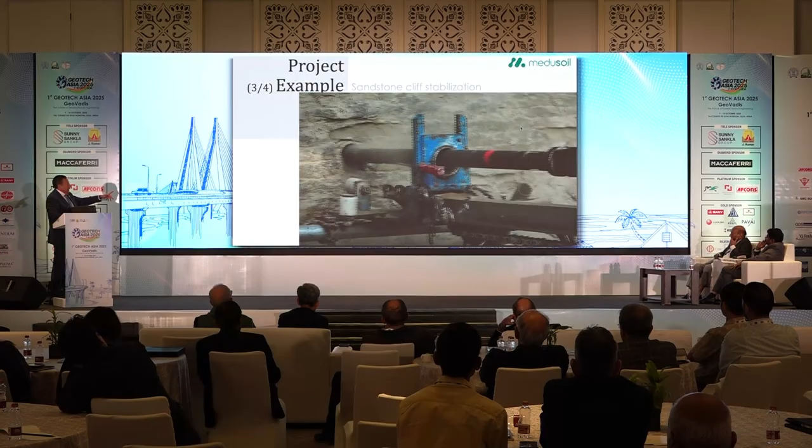We can do it also for other conditions. This is for slope stabilization. Here we inject horizontally. This is the bioreactor I was mentioning, where we put the solutions together, and we inject them with the different pockets that I was showing before.

Before concluding, what matters for me is really that this technology be used by practitioners on a daily basis. So I would like to show you a short video, one minute, with one of our engineers explaining to other engineers in his own words how this technology matters.

Can we have sound? We have the sound.

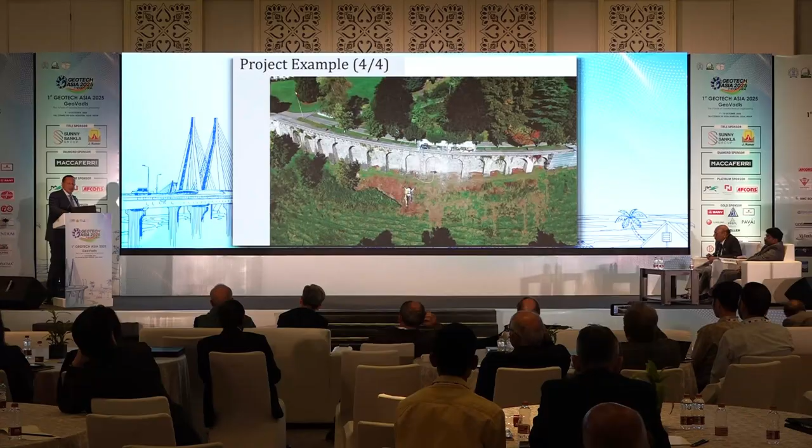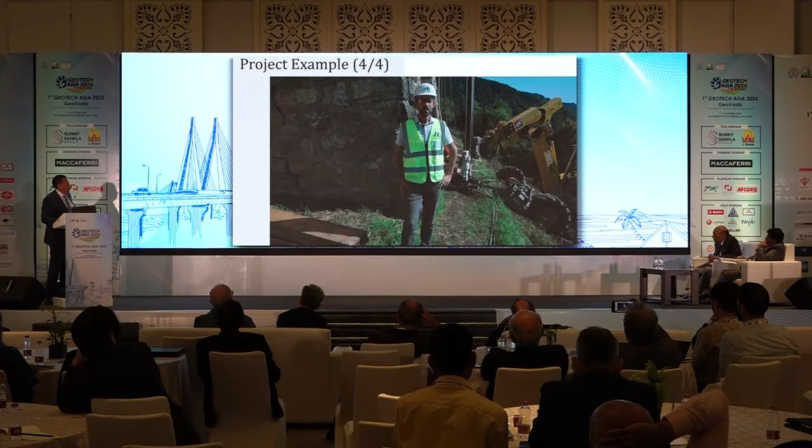Consolidate the weathered rocks in front of the buttresses of the retaining structure. An innovative and environmentally friendly solution, biocementation. Today on this site, the goal is to reinforce the soil at the base of the buttresses. We drill down until we reach the hard, unweathered rock, about 2 to 3 meters deep. Then, as we pull back up, we inject our biocementation liquid, which seeps in through the soil's porosity and spreads out. Under the effect of our microorganisms, calcite crystals precipitate, reinforcing the soil by providing cohesion, since these crystals bind the soil grains together, fill in the cracks, and strengthen and consolidate this soil, this weathered rock.

So what matters, I would say, is having a language for practitioner engineers to use on a daily basis to talk to others. But also what matters is having recognition from the practice, from the people, from the users.

I would like to read what their evaluation was. The judges said Medusoil presented a highly innovative product that addresses a known area that must be addressed by the industry if we are to achieve sustainable targets. Judges were impressed by the scalability and the use of standard, readily available plants and equipment. The panel realized that Medusoil had achieved something incredibly difficult to do. The evidence of real-life application was very impressive.

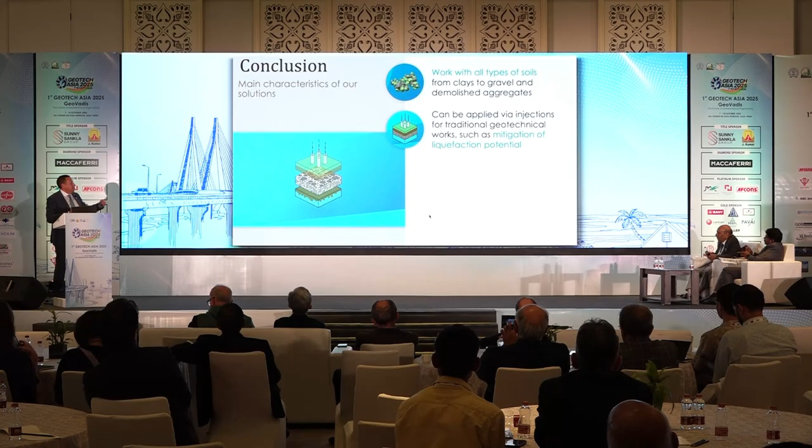To conclude, what I was trying to show you is how we transform scientific discoveries into market solutions. With this product, the characteristics of this solution are that it works with all types of soils, from clays to gravels, and can be applied via injection or with traditional equipment for mitigation of liquefaction potential. We can apply it via mixing, or as a shotcrete-like application for erosion control as mentioned before, but also in other situations, such as excavation, demolition, and waste valorization.

Thank you very much for your attention.